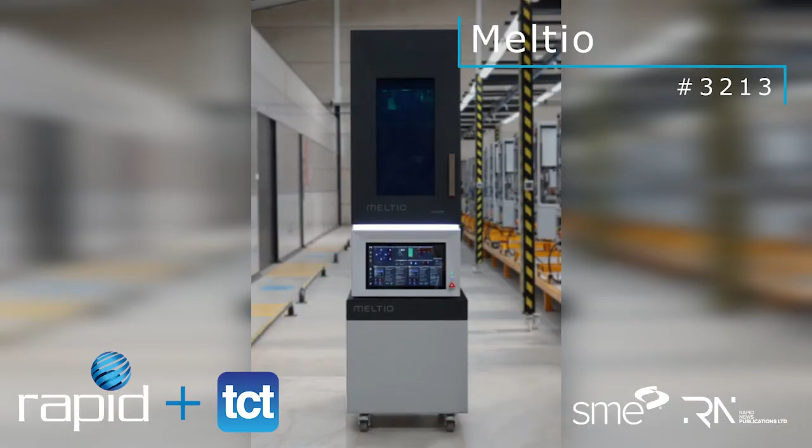The company's second-generation deposition head offers single or double wire feeds. The latter allows you to build parts, repair parts, or augment parts with additional features using 2 distinct materials. The material changeover is handled by the deposition head, which has dual feeders that are independently driven, meaning they're always at the ready to swap between one material and the other. There's also talk of a wire plus powder feed option, but you'll have to stop by their booth to get a better understanding of that.

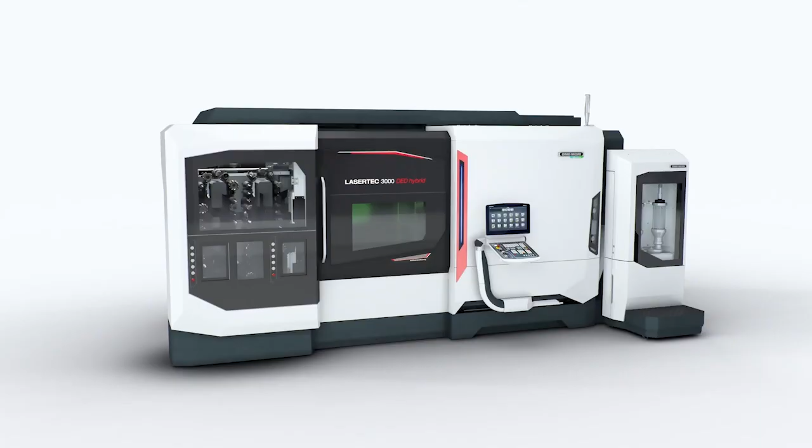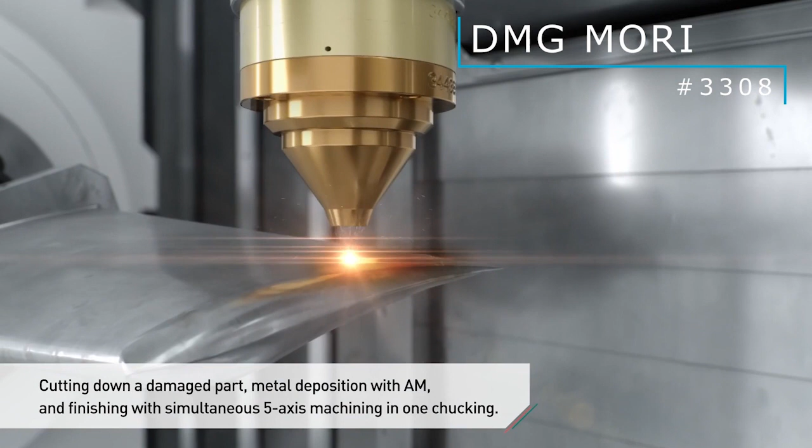Also in the DED category is DMG Mori with its new LASERTEC 3000 DED hybrid. This hybrid platform offers 5-axis machining and DED in one chucking. The platform is a turn mill machine, so the subtractive operations can either be turning or milling with onboard storage of 38 tools. Its capacity is parts up to 400 millimeters in diameter by 1.3 meters long. That's for the DED deposition aspect.

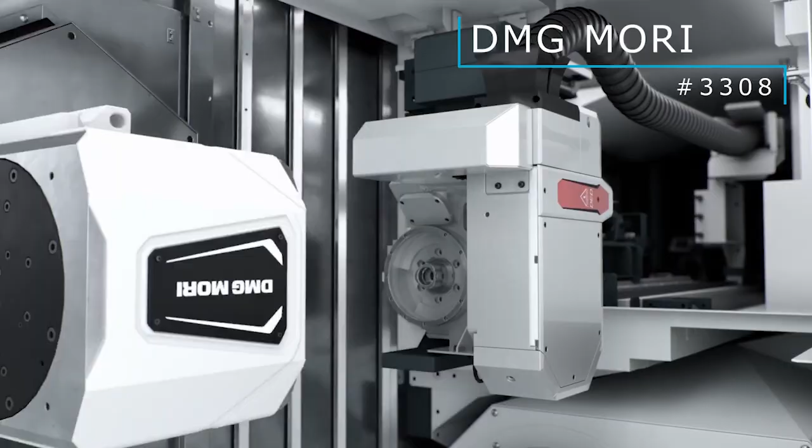On the AM side, it is a powder-based metal additive process. It's outfitted with a 3 kilowatt laser, and it has multi-material capabilities, either in discrete or mix-on-the-fly modes. The machine comes with AM Assistant for process control measures like melt pool temperature, powder supply calibration, detection of cutting chips on the powder nozzle, as well as quality inspection tools.

And DMG Mori is bringing additive intelligence to the US. No, it's not saying that we aren't intelligent. Additive intelligence is a consulting and application development arm of the company. It was established 5 years ago in its German operations, and this team leads companies through a step-by-step process that covers everything from use case selection through material development and manufacturing.

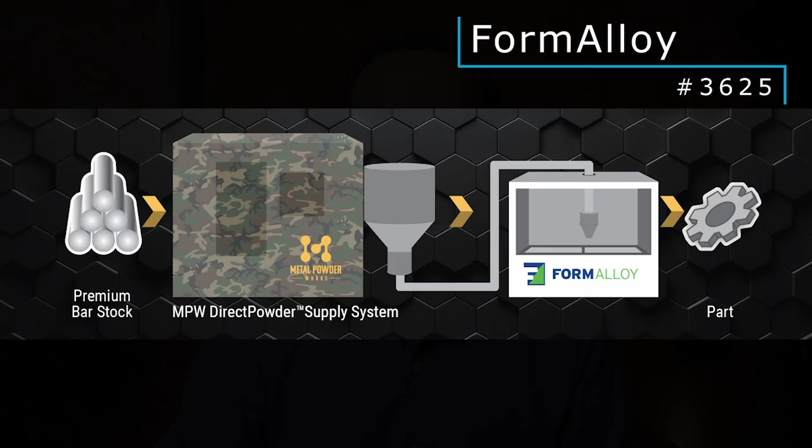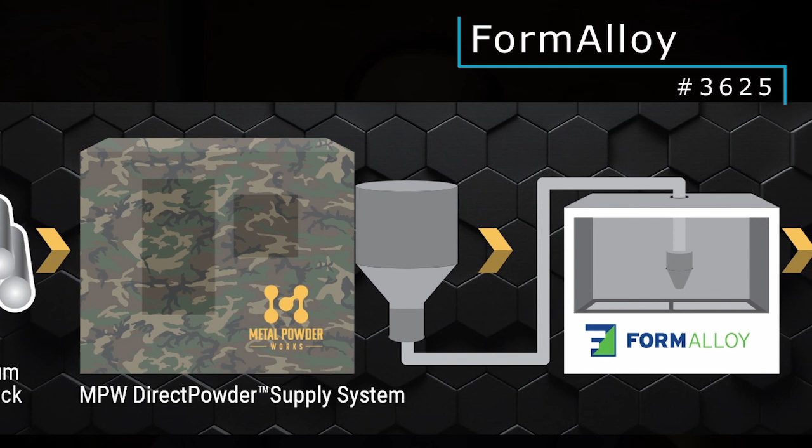Our next DED solution comes from FormAlloy. This one has me intrigued. It's called Project Sidecar, which is about rapidly deployable in-theater metal part production and repair. Others are tackling the military deployment of additive manufacturing, but Formalloy has a unique element in the solution to eliminate the hazards and hassles of dealing with metal powder. It enables safe, efficient, and fast conversion of bar stock to 3D printed metal parts. Formalloy's DED system utilizes powder made directly from bar stock on demand to eliminate the need to store and handle that powder. I have no idea how they make this happen, but I will be investigating.

Sticking with metal AM, let's shift to powder bed fusion and the new XM200G series from Xact Metal. XM200G aims to make high-speed metal 3D printing available for more customers, with a price starting at $90,000.

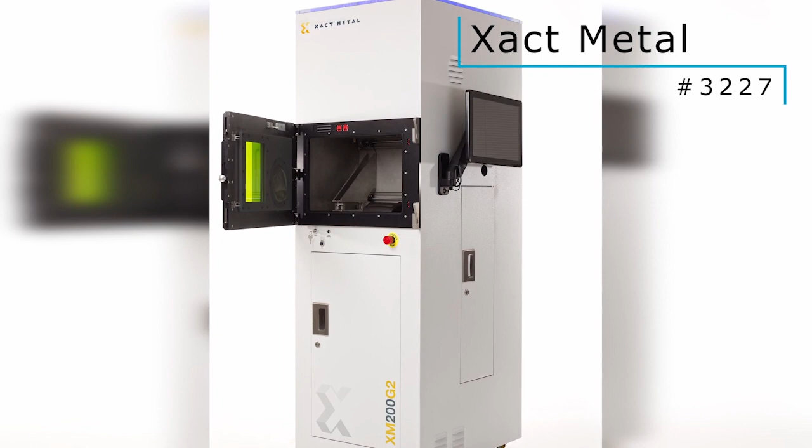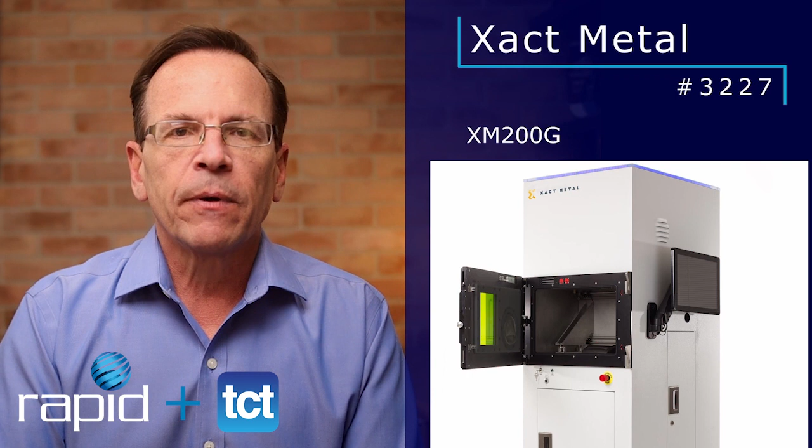Versus the XM200C, which I believe was discussed at RAPID TCT 2021, the G-Series has high-performance galvo systems for faster prints and dual laser capabilities. Whether you opt for a single or dual laser, you get the option of 100, 200, or 400 watt lasers, a build volume of 150 by 150 by 150 millimeters, and integrated powder handling.

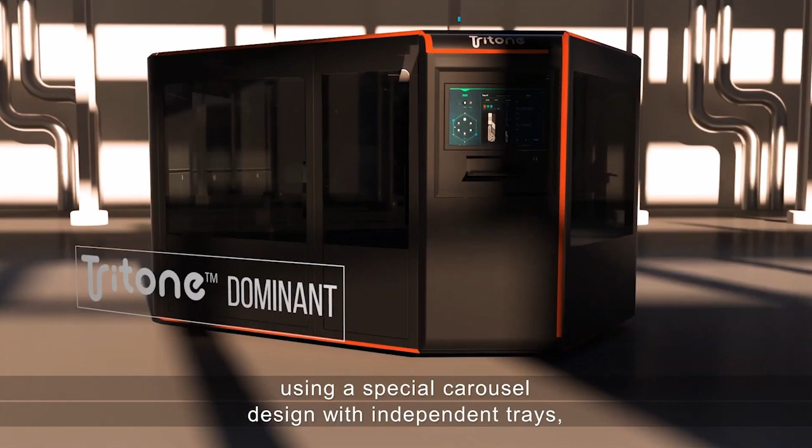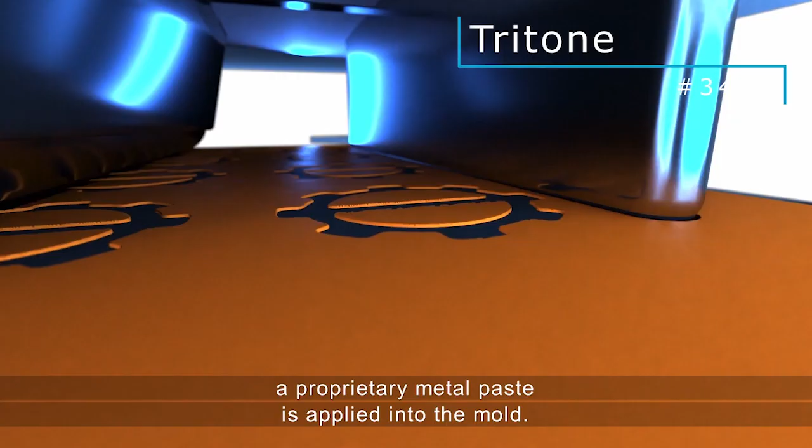And the last highlight for metal additive manufacturing comes from Tritone Technologies. Its new approach, called Mold Jet, blends jetting and extrusion in a 6-stage carousel-based process. The key steps to understand are that a layer of soluble mold is jetted, followed by an extrusion of a metal-filled paste into the cavity. Layer by layer, that process is repeated. After printing, the mold is dissolved and the parts are debound and sintered in a separate furnace.

So why would you take a look? Well, compared to binder jetting, the company claims crisper details and better surface finish, and higher alloy concentrations in the green parts, which means less shrinkage in the sintering furnace. Also, straightforward material handling. You can swap materials in less than 15 minutes with no exposure to metal powder, so PPE and filtration are not required.

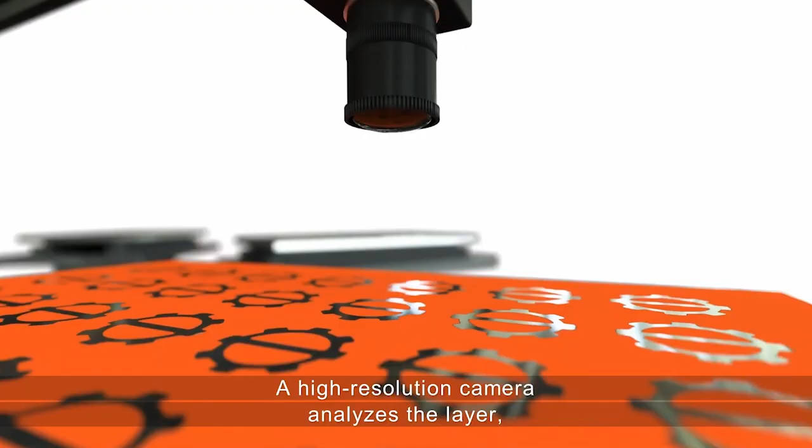This process includes layer-by-layer inspection using AI algorithms. If a fault is detected, the layer is removed and repeated. The machine is called Dominant, and Tritone plans a 2023 commercial release.

In the non-metals category, WASP has 2 new printers based on its liquid deposition modeling, or LDM for short, which uses delta motion control. These were announced in late 2021, and I believe this is the first display in North America. The first printer is the WASP 4070 HDP, which will be released this month.

HDP stands for High Definition Pellet, and as the name suggests, they are going after feature detail and finish with a pellet-based process. The build volume is 400 millimeters in diameter by 600 millimeters tall, and the granule or pellet capacity is 5 liters. The second printer is the WASP 4100 Clay with continuous feeding.

This printer isn't new. It's been available for 3 years. What is new is the continuous feed system that allows you to replenish the clay during the printing process. Yes, it can print clay, but the primary target is the production of ceramic parts. Oh, and by the way, the company also mentions refractory metals.

This machine is based off of the same platform as the 4070, so its build area is a diameter of 400 millimeters, but elimination of the heated build plate increases build height to 1 meter tall.

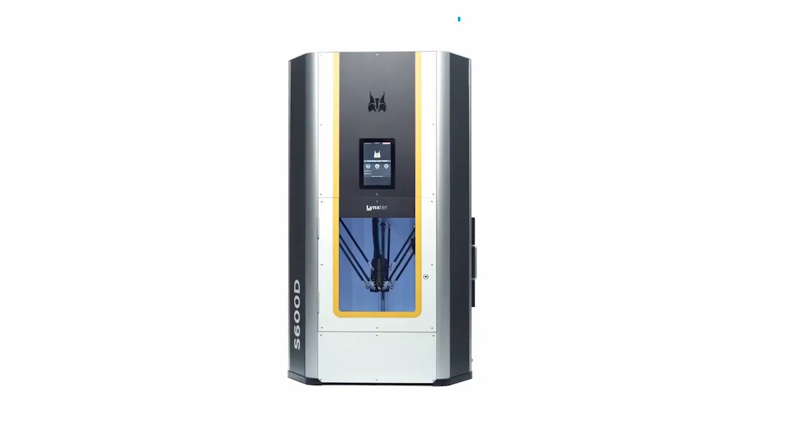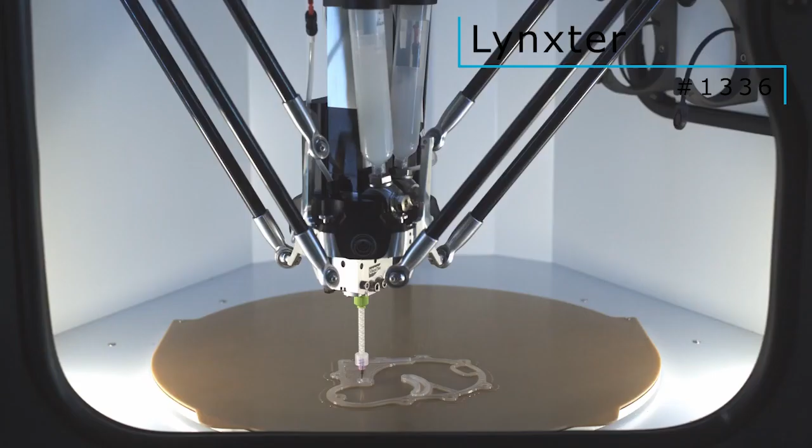Also in the material extrusion category is Lynxter with 2 new printhead options for its S600D printer, which is modular and supports interchangeable toolheads. With the LIQ11 and LIQ21, you can print thermoset materials that don't require UV curing. This opens the door to silicones, polyurethanes, and more. And this is in addition to what it can already do, which is thermoplastic filaments and pastes.

By the way, the S600D platform is similar to the WASP 4070. It uses delta motion and has a 390 millimeter diameter by 600 millimeter height build volume.

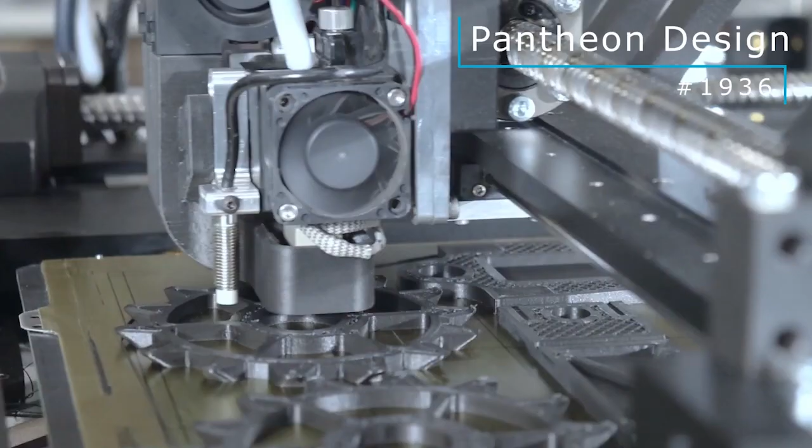Pantheon Design will launch the HS3 high-speed extrusion 3D printer at RAPID TCT. This unit addresses speed and quality in a reasonably priced unit starting at $8,000. The company says that this is the result of ground-up redesign with the goal of serving those that just want their 3D printer to work well.

The company claims 3 to 5 times the speed of competitive units and cites its new extruder as being outfitted with closed-loop controls and nozzle contact probing while printing at flow rates of 120 cubic millimeters per second.

Now I turn to material jetting. Quantica invites you to stop by to learn about its printhead technology, which can jet materials that are 15 times more viscous than the norm for material jetting technologies. The company states that it can reliably jet materials beyond 300 centipoise, at temperatures up to 100 degrees C. This opens the door to new materials with a wider range of properties.

Presently, the printhead technology is functioning on an application development platform, but Quantica has stated that it will be releasing information on its new Jetpack just prior to RAPID TCT. Jetpack will be a solution for testing and development specifically designed and optimized for drop watching of materials that can be jetted with the new printhead technology.

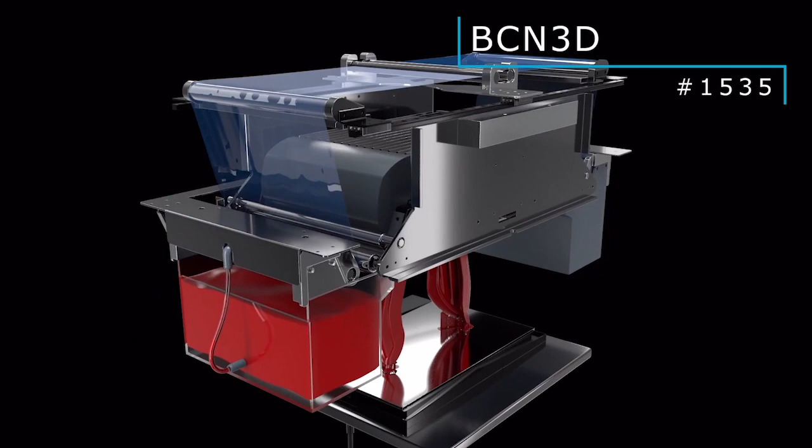The second of our entirely new solutions comes from BCN3D, which you may recognize for its FFF printers. I'd say this belongs to the VAT photopolymerization category, but could be persuaded to list it in sheet lamination. The reason it has no clear home in the ASTM categorization scheme is that there is no VAT and the raw material is a viscous fluid, not a sheet.

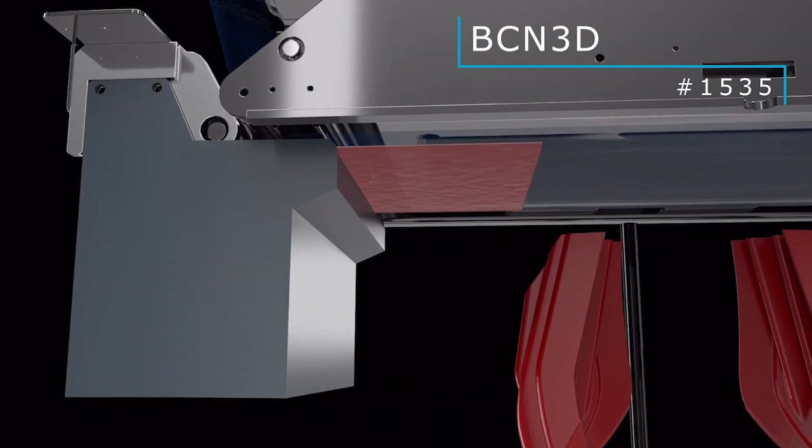The process is called viscous lithography manufacturing, or VLM. In short, resin coats a transfer film that is located above the build area. Then the build plate, or previously printed part, is brought up to that transfer film. Using an LCD panel, UV light then cures the layer. Since the transfer film can be coated from either the right side or the left, dual material printing is possible. Like Quantica, BCN3D is addressing viscosity limits to open the doors to more materials, including filled materials. The company claims that it can use resins that are 50 times more viscous than the usual photopolymers in the additive manufacturing realm.

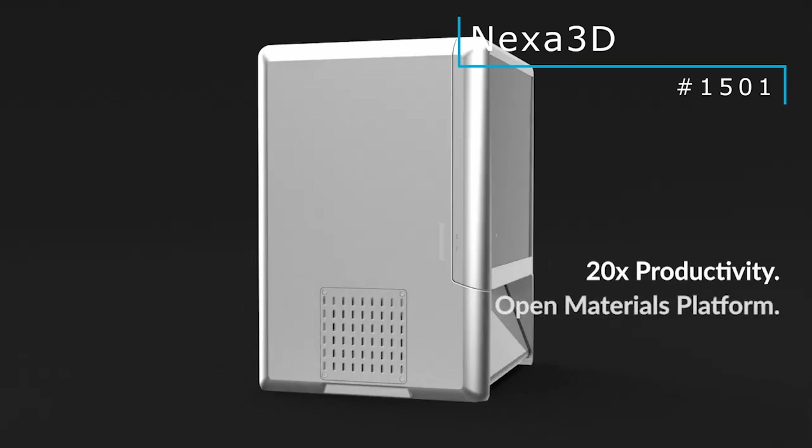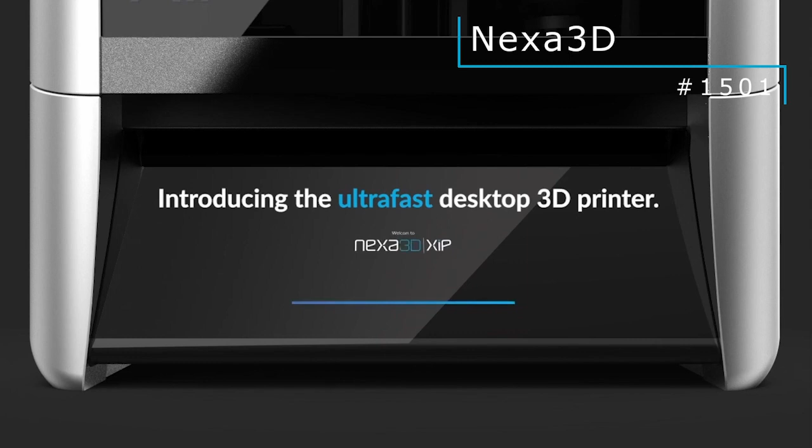Sticking with photopolymerization, I bring you Nexa3D's XiP desktop printer. XiP uses the company's lubricant sublayer photo curing, LSPC for short, and delivers print speeds of up to 18 centimeters per hour, offering a 4.8 liter build volume and high resolution generated by a 4K LCD panel. Other features worth noting: it's a fully open material platform, it has quick and easy resin loading, and you can do that during a print job. It uses smart resin cartridges for touch-free loading and intelligent resin leveling, and has a toolless VAT system that clamps in place with electromagnets.

The last printers in the roundup are Carbon's M3 and M3 Max, both of which use the company's digital light synthesis technology. These are a further evolution of the company's M-series line of printers with a focus on throughput and new capabilities. The difference between these models is in build volume. The M3 maintains the capacity of the M2, which is 7.4 by 4.6 by 12.8 inches. Now, using a 4K light engine, the M3 Max has double the build area with the same resolution as the M3. Highlights of both include improved thermal management to accelerate printing by up to 2.5 times, lower force imposed on parts, plus closed-loop temperature and force control to reduce failure modes, and improved part-to-part consistency.

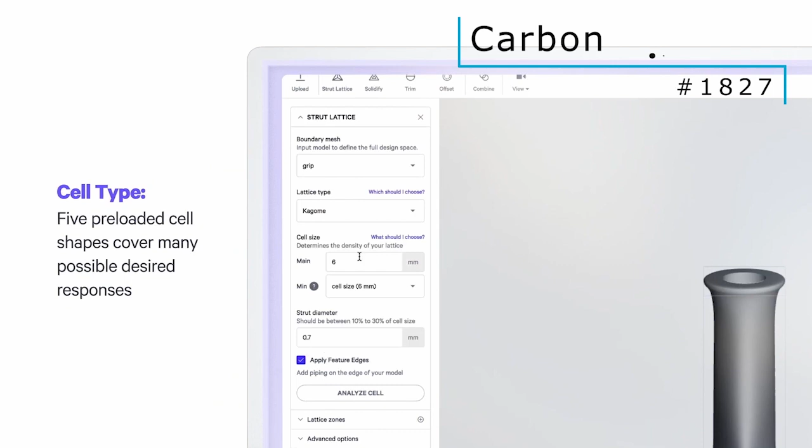Sticking with Carbon, I'll transition to software with a highlight of its design engine, which automates the design of complex parts with complex structures like lattices. Now, design engine isn't new, but what is new is that Carbon has made it available to all, whether you have a Carbon printer or not. The primary goals of the software are to save time and energy in design, easily iterate designs, and produce tuned lattices that meet specific mechanical, aesthetic, and other design requirements.

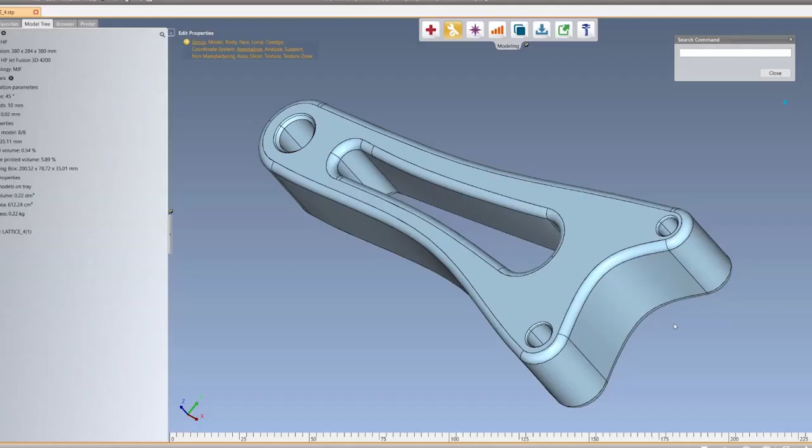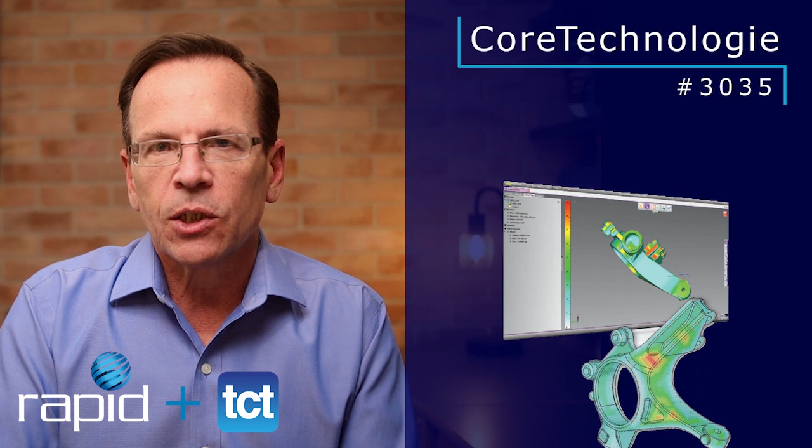Sticking with the design aspect, we have CoreTechnologie and its 4D additive manufacturing suite. This is a standalone package that uses intelligent BREP, or boundary representation, geometry to optimize CAD data for additive manufacturing. So you start in CAD and then you turn to the 4D additive software to optimize for minimizing printing time while yielding the highest quality finished parts. Additional capabilities include healing, texturing, labeling, variable density lattice generation, nesting, and support generation.

So we've covered two-part design and preparation software solutions. Now let's move to process development and optimization with Exponential Technologies XT AMI. This is a platform for intelligent printer parameter development that can reduce R&D time by up to 95% and print times by 25% while delivering better results. This data science platform puts advanced capabilities in the hands of any engineer. XT AMI is easy to use, doesn't require statistical or programming knowledge, and fits perfectly into any existing workflow. A key element is that it allows you to reduce the number of test builds by learning from past experiments and data points. The bottom line, according to the company, is that XT AMI brings users as close to first time right as possible.

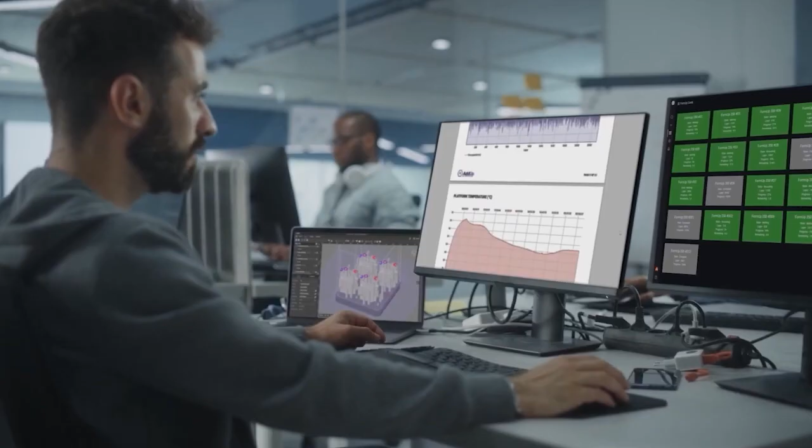Moving on to printer operations, we have AddUp and its dashboards for process monitoring. This is the first in AddUp's full suite of monitoring software to close the loop on AM processes. This will be followed by recoat monitoring and melt pool monitoring later this year.

Dashboards is an option with any AddUp machine that collects all production data in real time and presents it in a dashboard format that is customizable for different user needs and preferences. That data is available with a simple click to view current and historical information, drilling all the way down to the individual layer for any print, or all the way up to show printer usage.

There's been plenty of conversation around software with respect to effective workflows. Should we continue to rely on discrete specialist software for each step in the workflow, which means learning different interfaces and dealing with imports and exports? Or should we move to a data architecture backbone that provides hooks into the data and access to functionality to make the workflow seamless? The latter solution allows specialist applications to function as a whole.

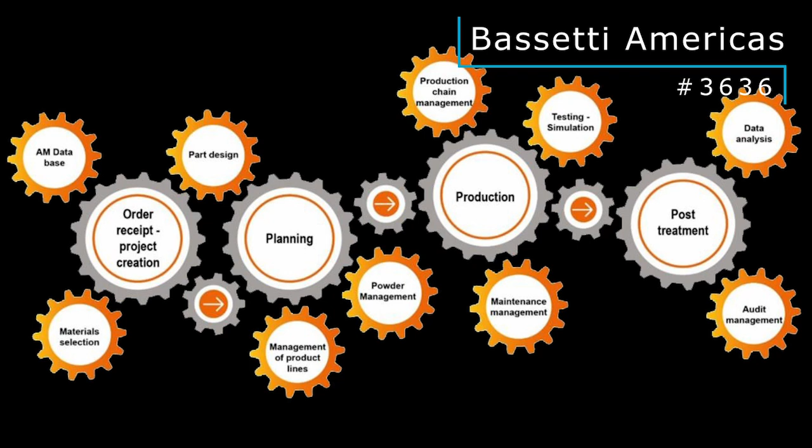Bassetti's TEEXMA provides an alternative, an end-to-end solution in one modular package. TEEXMA for additive manufacturing R&D was released two years ago. Following the acquisition of 3D Trust one year ago, Bassetti expanded the functionality to be the end-to-end software solution for design through implementation to production. Its latest release, version 5, improves the link between the portal for quoting and ordering and production.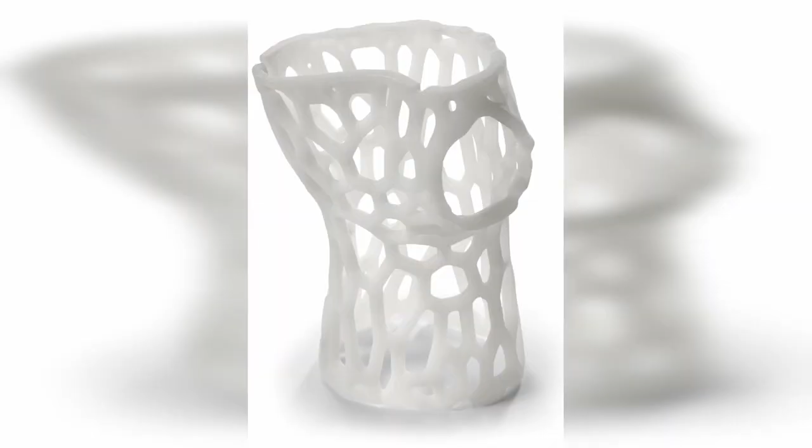I'll now cover a few new additive manufacturing materials that you can see at RAPID TCT. AM Polymers has a new plug-and-play polypropylene for powder bed fusion printers, including both laser sintering and high-speed sintering using either fiber or diode lasers. It's called Relaserit PP01. This isn't the company's first polypropylene, but PP01 is its new budget-friendly variant. Part of the plug-and-play versus plug-and-pray promise is that PP01 recoating with a blade can be done without significant effort on your part.

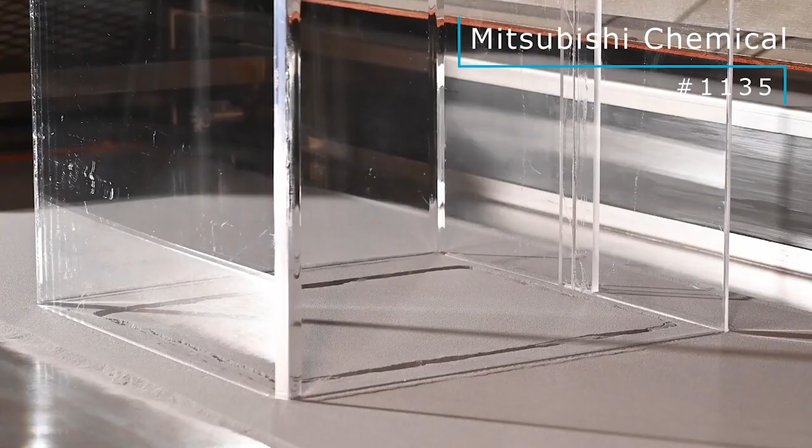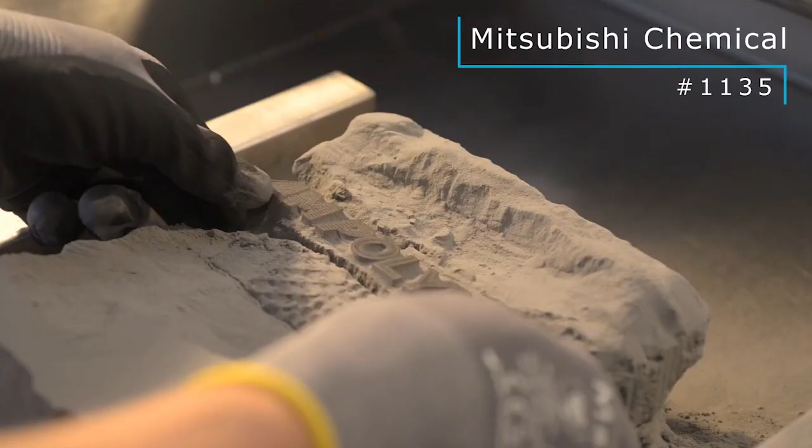There's another Relaserit material that was born from a collaboration between Mitsubishi Chemical and AM Polymers. This one is a PBT named Relaserit PBT. Like the polypropylene material, it can be used on a variety of PBF machines with a plug-and-play approach. Relaserit PBT powder delivers excellent mechanical properties such as low water absorption, UV stability, and impact strength. It prints easily without the need for high-temperature printers. The material will be rolled out in North America this year.

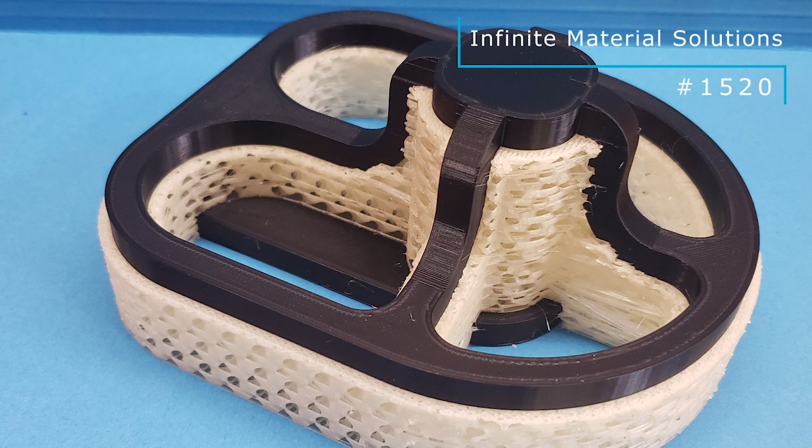The final material I'll highlight comes from Infinite Material Solutions. Aquasys GP, the GP stands for General Purpose, is a soluble support material for low-end desktop fused filament fabrication machines. The company states that it is a high-performance support material compatible with conventional thermoplastic build materials and processes. It's a direct replacement for PVA and is a room temperature, drain water safe, soluble material. The latter point is because it requires no harsh chemicals for support removal.

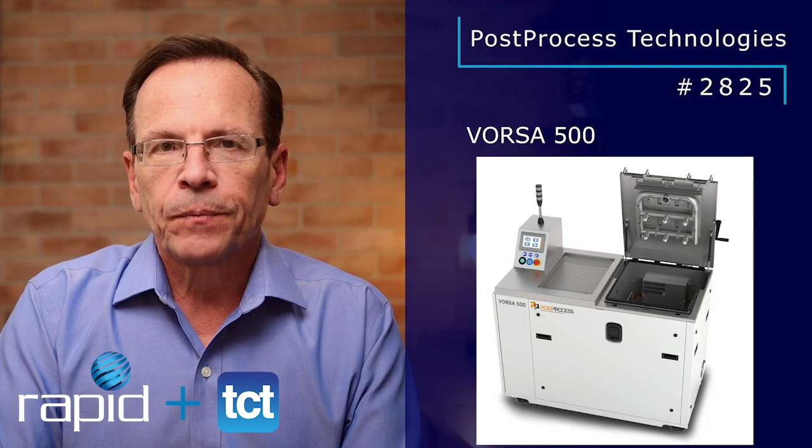We've covered hardware, we've covered software and materials. Now let's move on to post-processing and ancillary solutions. I'll start with PostProcess Technologies and its latest in the line of FDM or FFF support removal solutions, the Vorsa 500. According to the company, it provides the fastest cycle times in the industry, reducing processing time by over 50% compared to submersible tank systems, and it uses one-half to one-quarter of the energy needed for a wash tank. Vorsa 500 uses the company's volumetric velocity dispersion technology, which employs multi-dimensional spray coverage. The process is further enhanced with the company's software-driven finishing solution called AUTOMAT3D.

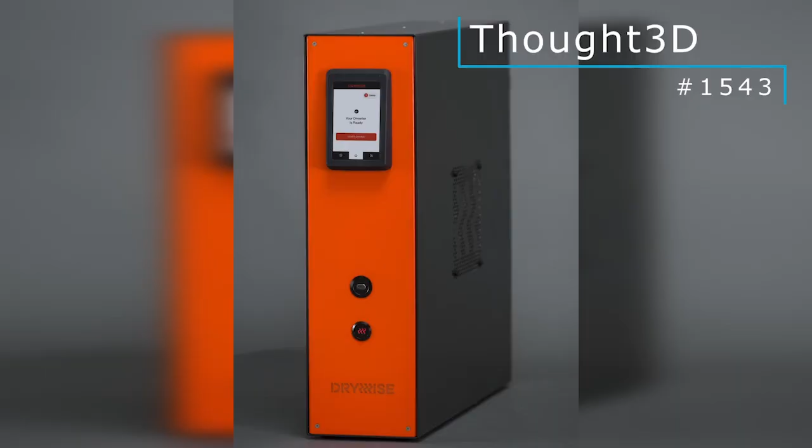In the ancillary category, Thought3D will be showing off its DryWise inline filament dryer. This is a standalone machine used in tandem with a 3D printer to dry hygroscopic filaments in real time, meaning while you are printing. DryWise preheats a segment of material in under an hour and keeps drying the filament in line while you are 3D printing. The company's goals are to reduce drying time, which can take 4 to 10 hours in a typical cabinet, provide confidence in print quality with consistent moisture levels, and reduce energy consumption.

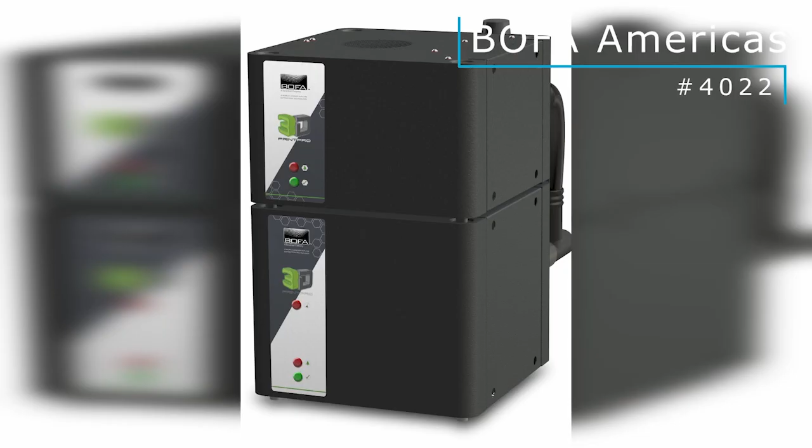BOFA also has a companion product for your 3D printers, but it isn't moisture that it targets. Instead, it tackles fumes and particulates, or in its words, atmosphere management. On display will be the 3D Print Pro HT for high-temperature polymer printing and AM400 for metal printing. The 3D Print Pro HT is the first for high-temperature, up to 230 degrees Celsius, fume extraction, fumes that can be unpleasant or hazardous. It also circulates air within the build chamber to prevent particulate buildup on parts and printer components. The AM400 is for particulate, or condensate, removal in metal AM processes.

It can be used standalone or integrated with your metal additive manufacturing machine running with argon or nitrogen. The key benefit is that the filters can be exchanged without risking a thermal event, meaning fire or explosion, while being easy for the operator. The AM400 also features long filter life.

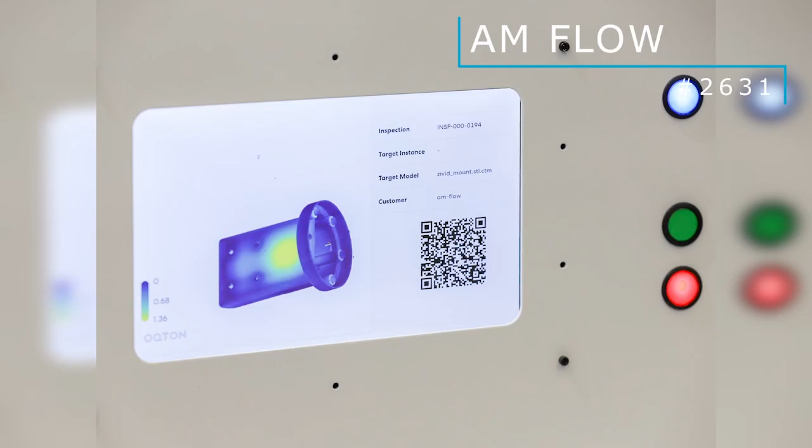Now I'm going to move on to 3D scanning solutions from 6 companies. AM Flow has extended its post-print automation solutions with AM Quality, developed in collaboration with Oqton. AM Quality is a standalone quality assessment solution that provides geometric assessment in under 2 minutes, with an accuracy between 0.1 and 0.5 millimeter. It uses structured light scanning technology. If it's like the balance of AM Flow solutions, it will feature automatic or semi-automatic part identification. The company states that this is the first in a series of quality assessment solutions that it is developing as part of a fully end-to-end digital additive manufacturing production line.

Polyga Compact S1 is the newest in the company's line of compact scanners. This unit offers affordable entry-level scanning, and there are 2 versions, the S1 and the S1 Wide, which doubles the field of view and compatible part size. Both models capture 2 million points. The S1 does that in half a second at 35 micron accuracy, and the S1 Wide does it in 1.4 seconds at 40 microns. Regarding affordability, I believe the price is between $3,000 and $6,000, but you'll have to confirm that with them.

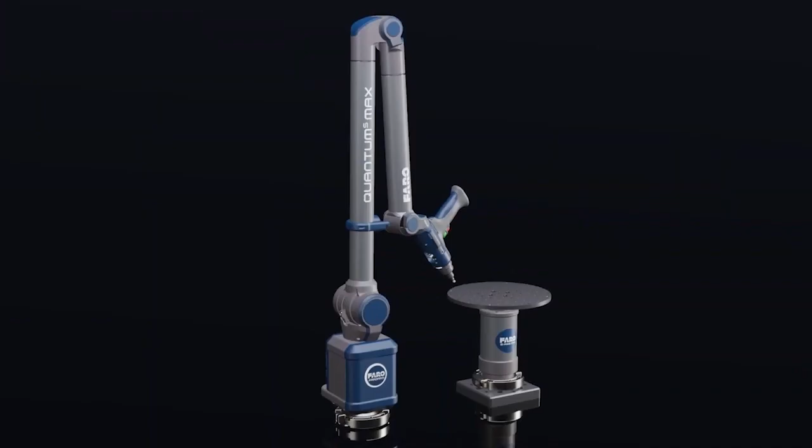Faro Technologies will be showing off its all-new Quantum Max scan arm, which features 3 purpose-built, hot-swappable laser line probes. That means you can swap a wide field of view probe for one that captures fine details without interrupting your workflow. Each of the laser line probes, the XR, the XP, and the XS, is enhanced with Faro CLR, which stands for Continuous Light Reflection. That allows the capture of high-quality scans from dark, translucent, and reflective surfaces. The Quantum Max scan arm is fully compatible with Faro Cam2 software and its repeat part management feature, which allows guided inspection routines to be pre-programmed.

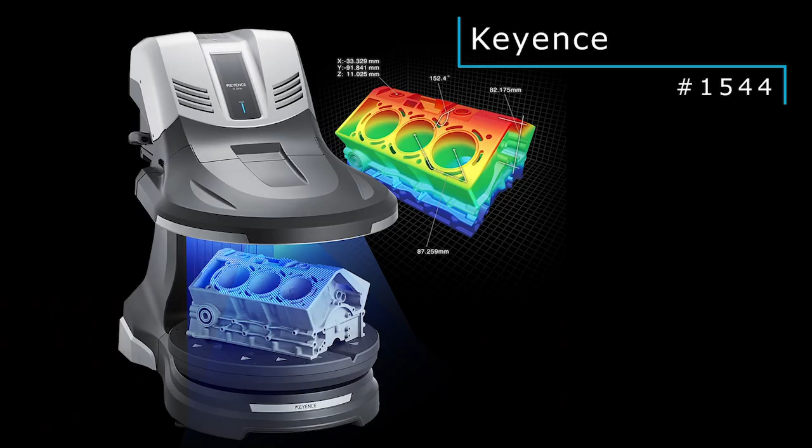Next up is Keyence's VL500 3D scanning CMM, which the company states is the first fully non-contact CMM. The scanner incorporates a turntable for one-click automated scanning. While you lose that one-click option, the scanner head is removable so that you can capture larger objects. The company states that the VL500 has 2 micron repeatability, and it guarantees out-of-the-box accuracy to NIST standards. Each unit comes with a calibration certificate, inspection report, and traceability diagram. What's more, there's a calibration board that you can use to verify that your scanner continues to produce accurate results.

So far, we've covered laser scanning solutions. Now we'll turn to CT scanning.

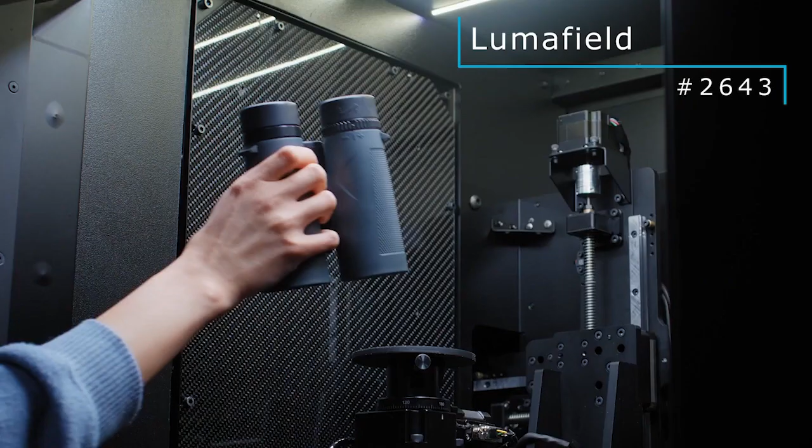Just a few weeks ago, Lumafield came out of stealth mode, and it will be at RAPID TCT with its Neptune CT scanner and Voyager analysis software. The company's aim is to make CT scanning accessible by eliminating the upfront investment and maximizing ease of use. On the investment side, the company is using a hardware as a service model with monthly prices starting at $3,000. On the ease of use front, Voyager, which is cloud-based, provides the know-how and expertise. Targeting reverse engineering and CAD comparisons, Neptune has a scanning envelope of 155 millimeters in diameter by 300 millimeters tall and an accuracy of 25 micron. The X-ray source has enough energy to punch through plastics and some metals, so long as the thickness is reasonable. You can now reserve a Neptune with expected delivery in the 4th quarter of this year.

I'll close out this video with a new CT scanning system from Pinnacle X-ray Solutions, the PXS CT600 production system. There are 2 models available, Type 2, which can handle parts up to 6 inches in diameter by 24 inches tall, and the Type 4 with a capacity of 18 inches in diameter by 24 inches tall. Both have plenty of energy, 600 kilovolts to be exact, to scan multiple parts at once or to see through high alloy parts like those made in nickel or Inconel. And it can be fast, with scans taking as little as a few seconds to a few minutes. This is a metrology-grade system for inspection of your production output, and it can be used in line with your manufacturing processes.